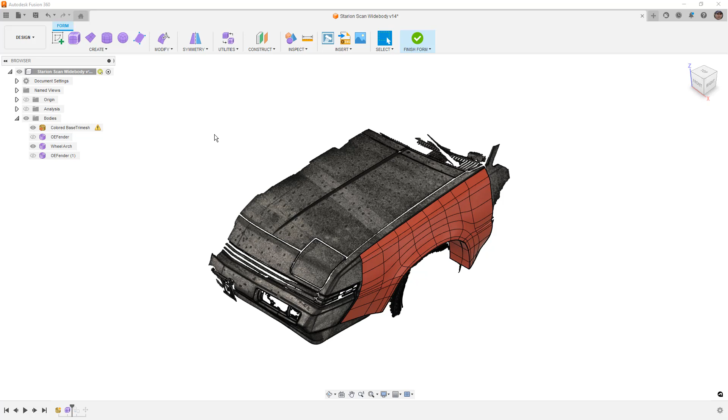I've asked for feedback on details or features you'd like to see. I had a comment for some canards, for some venting, and these are all features we can get to, but generally those are going to be much easier and more realistic to do after the form is done, in surfaces where we can have better control over things like cutouts and creating things like the canards on the front. We will get to those features, and I appreciate all the comments, so I'll tackle those as surfaces later on.

At this stage, what we want to do is take a look at what we have and any updates and changes we want to make. In the last video, we started adding some detail because we connected all the pieces together.

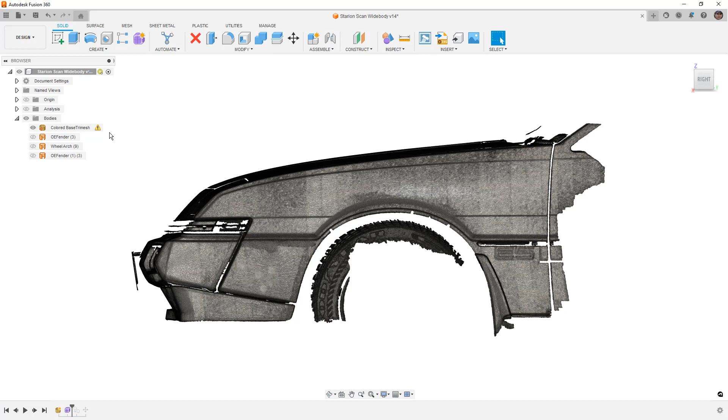If you're just opening this data set, you'll probably have to go into the form's workspace, which means double clicking or right clicking and editing the form. Before you do that, I always think it's important that you hide all the other surfaces. If we don't, for example if I show this fender and go into edit, I'll get this ghosted version of the fender, and that can be problematic when you're trying to model something. So I like to hide those. The mesh body doesn't really matter, but I do like to hide the original.

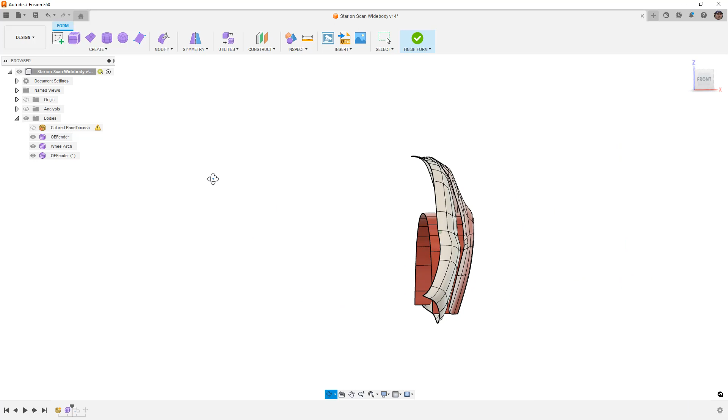Now we're going to talk about some of the things we still need to do to clean up this version. We haven't added all the detail, there's still more to do, but you'll notice the wheel opening, the arch, is not really smooth. We've added some extra edges and some things have changed, and now you can see it's sort of pulled away in this corner. So we need to fix that.

Before I get too much further, there was a big Fusion 360 update this week. You might see some changes. If you open a file, it might ask you to update if it was created in an older version of Fusion. This is happening on Saturday, February 4th, when I'm filming this. This video will probably come out tomorrow, depending on if I edit it tonight or not. But there's a chance, since updates happen frequently, that you might need to update the form body.

Just keep that in mind. I do want to also note that my settings here, the environment is photo booth, the effects, ground shadows, ambient occlusion, anti-aliasing, those are all turned on. And my visual style is shaded with visible edges.

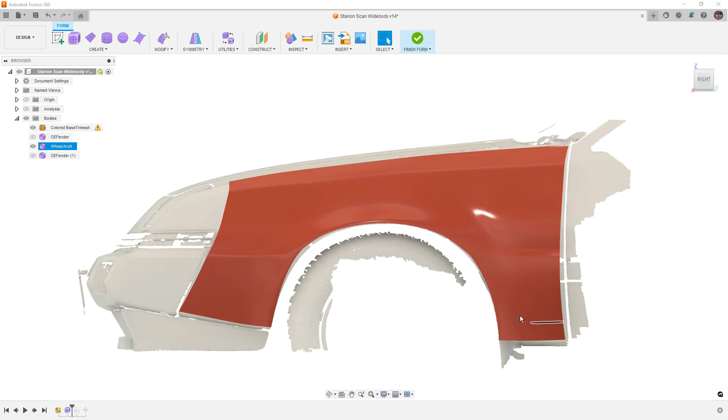Now, I do toggle back and forth between shaded, which is Control 4, and shaded with edges, Control 6. I like to do that because it helps me see the shape a little bit better and see how it reacts to the light. This helps me find problems in the design. And I also use Alt 1 and Alt 4, which allows me to go back and forth between box display and smooth display.

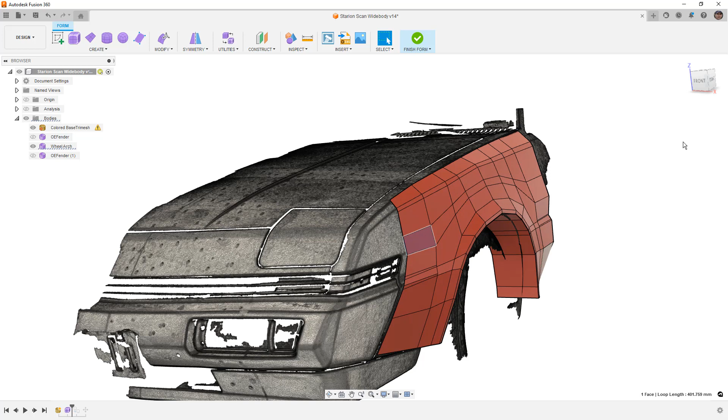So keep those two things in mind. Those are generally the shortcut keys that I use quite a bit when I'm working with forms. Now that we have that said, let's talk about some of the issues or errors that we want to take care of, some things that we want to fix in here.

So generally when you're working with forms and you're dealing with a wheel opening or a wheel arch that is mostly cylindrical. There are almost no cars out there where this is actually a true cylinder. In most cases, they're stretched out a little bit from front to back, or squared off in some cases, depending on the vehicle. In this case, we started out with a perfect cylinder and had a really good match for the car, but as soon as we started to add more edges, things got a little out of hand.

Now, one of the things that we want to look for when working in forms is that the edges should generally point to the center of the wheel. And what we have here is we've got these edges that point to the center of the wheel, but we've got some that are not. You can see here, these are pointing down. And what ends up happening is this is going to cause us some problems in the curvature.

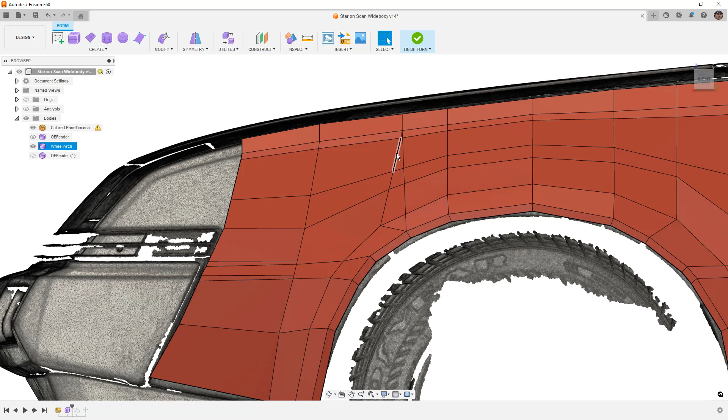So some of the things that I want to fix first is I want to go into insert point, and I'm going to just sort of re-topologize this by adding that edge. I'll double click this one and hit delete and sort of clean that up a little bit. Now, while that's not a perfect solution, a lot of times that does help us smooth things out a little bit.

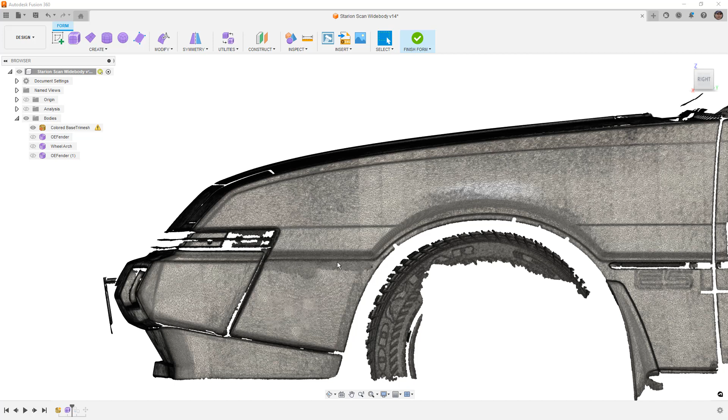The next thing that we want to do is we want to fix what's going on in this corner. Now, this is a tricky one to do in forms because ultimately what we're looking to do is we're looking to try to match the curvature or the edges that are on this car.

It's kind of hard to see in this sort of scan view, but we have some harder edges on the car that go straight back and terminate into this flare. And then we've got these harder edges that go back and actually roll up and over the arch.

This kind of geometry is very tough to do with forms simply because of the way that forms works in Fusion 360. So we do need to manipulate things a little bit. And of course, when you're making a fender flare, you don't need to match the original geometry perfectly, but I do think it's nice to try to do that and work with it when you can.

So what I'm going to do is I'm going to begin manipulating some of these edges by using edit form. I'm going to do a box select here. Now, I did have a comment about an older video.

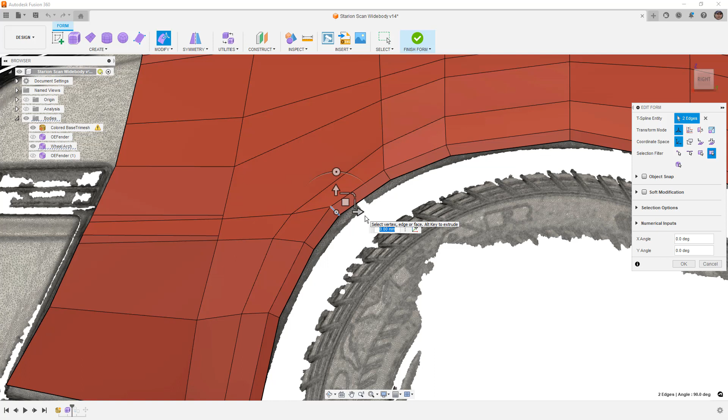Someone was using box select and they were having trouble getting these edges when they were looking at it in the side view. Now, if you use box select, there's a couple things to think about. When you go from the top left to bottom right, box select will grab anything that's completely inside of the box. If you go from the bottom right to the top left, it's going to grab anything that the box touches.

That's important because you'll notice that we've got edges and faces selected, but not vertices. It's just the way that it works. So whenever you're trying to select just this edge to move things around, top left to bottom right, you want to double check your selection dialog for your selection filters. And you can see here that we've got T-spline edges, faces, and vertices.

If I happen to have edges turned off, I won't be able to select the edges necessarily, but it is a selection priority. You can see here that it does end up turning itself on and off depending on your settings.

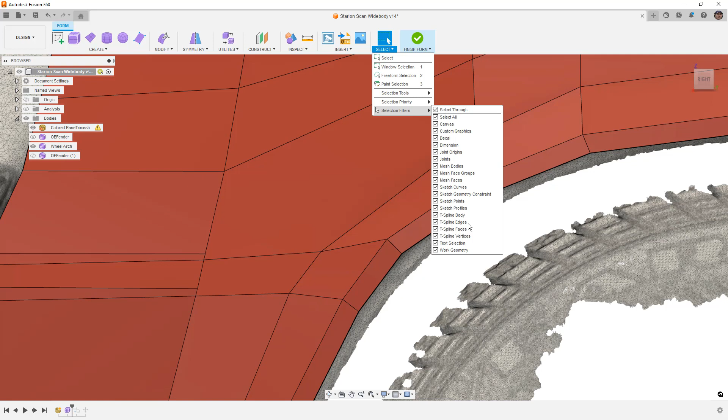Now the reason I mention that is because when you're out of the edit form tool and you go to your selection filters, you have a very different list here. You've got your T-spline body edges and faces and the T-spline vertices, but this is a different selection menu when you're in edit form. So just double check that if you are having problems following along in making those selections.

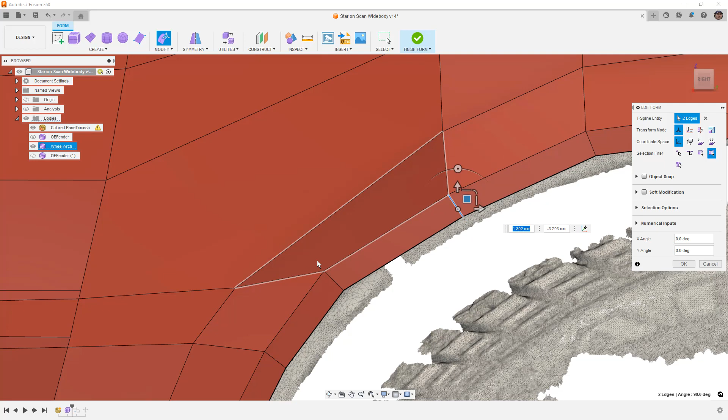With that out of the way, what I'm going to do is box select this edge here, which also grabs the one going straight back, and begin manipulating the entire thing into position. Now, generally what we do when manipulating things manually like this, which is usually a last resort, you want to start by using things like scale and rotate and moving entire edges around. But when we're doing it manually like this, what we're trying to look for is the transition between each of these edges. We never want a straight line and we never want a drastic change. We want it to be very gradual.

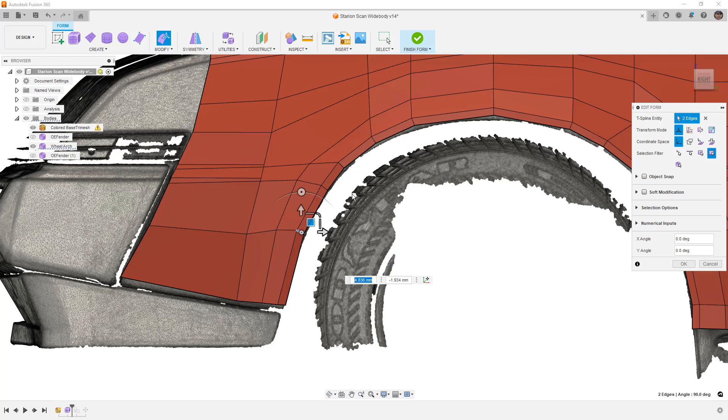Same thing over here. We've got a fairly drastic change in terms of the angle between these two edges, and then essentially a flat or completely straight line here. Now that's going to cause us problems, so I want to make sure that I move this around and adjust these angles accordingly. So again, just moving it around a little bit.

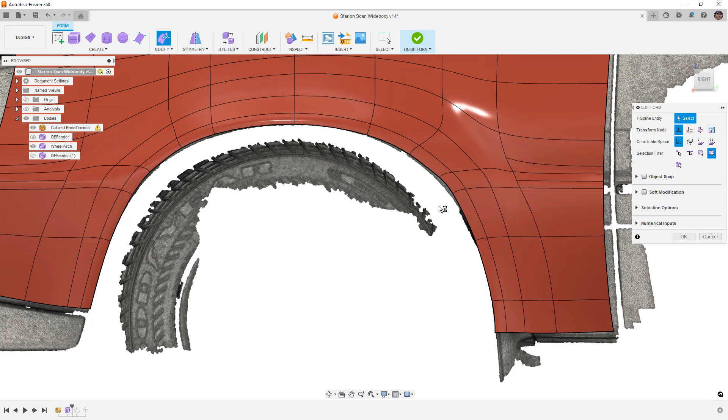And now I'm going to go to Alt and 3 and take a look at the smooth display. You can see we're a little bit closer. It is still pulling in this area just slightly, but it's looking better.

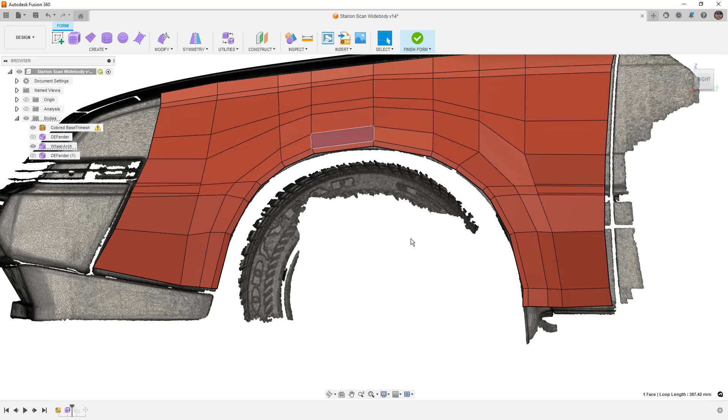Now, before I go any further, what I want to do at this stage is use the utility make uniform. This is something that when you're working in forms, you'll end up doing quite often, because what it ends up doing, if we go back and forth between box and smooth display, is it's going to take the geometry in the box display and the geometry in the smooth display and almost stretch them out.

Now, the box display is our guide. It's the rule that we're using to create the curvature. And oftentimes the edges in smooth display, for example if we take a look at this edge, these edges are in different positions because ultimately what we're doing is driving the tangency and curvature directions. So when we use something like utilities and make uniform, pay close attention to some of the geometry.

For example, in this area right here, when we say OK, you'll notice that these two edges stretched out just slightly. If I undo and redo, you can see what's happening is this edge pulls in just slightly and these edges spread out. So the make uniform is helping us relieve tension in certain areas of these different surfaces that we're creating. Now, it's not like a band-aid tool, but it's something that you do want to be comfortable with when you're playing around with your forms.

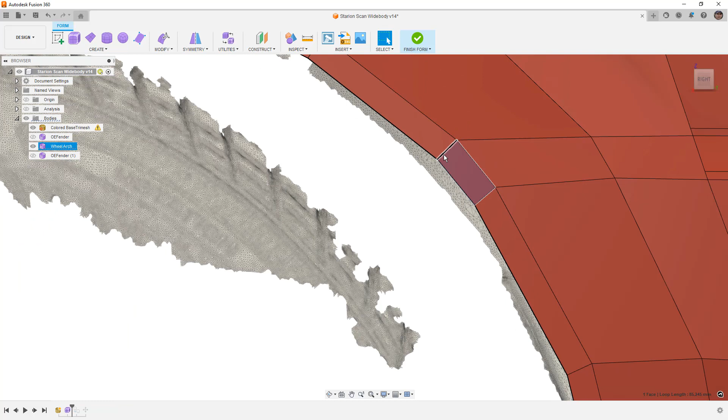Now, at this stage, I'll note that this is still not great. And if we take a look at this in box display, it's because of basically the angle of these edges, and these transitions here, that's causing us problems. So I'm going to do a little bit more work here and see if I can sort of normalize this curvature. I'm going to pull this one up slightly.

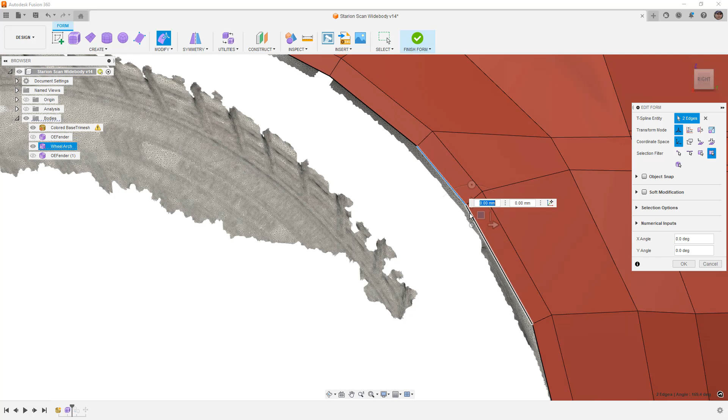I'm going to pull this one down. And when I'm doing this, again, I'm looking at the change in angle between these edges, and I'm trying to make it the same as the change in angle between these edges. So when I go back to my smooth display, it's looking a little bit better. And once again, I like to use the utilities make uniform and just make sure that we don't have any drastic changes there. So that looks pretty good.

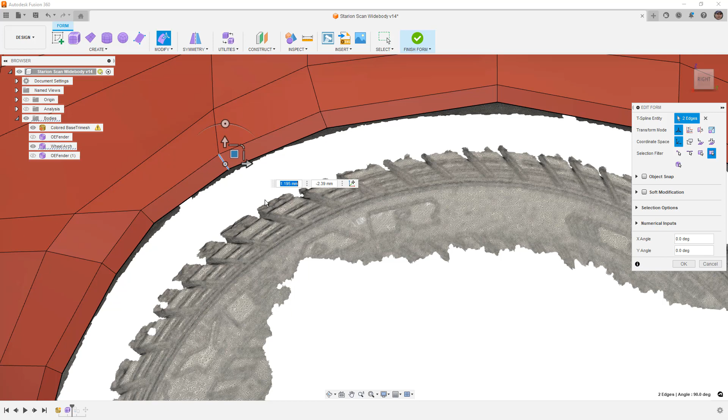I still have some areas over here that I want to fix. I'm always doing this in box display. I don't like to get into the habit of doing this in smooth display because it ends up creating bad geometry if you're trying to force the smooth display to look a certain way. So you want to really get comfortable with doing this in the box display and getting pretty good at it.

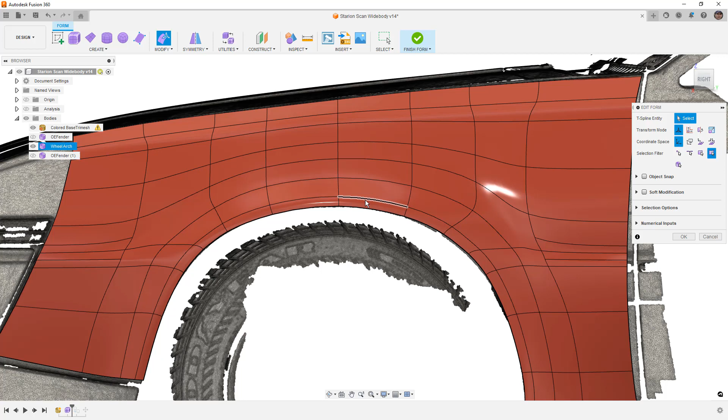From here, I will note that the size of these faces is changing. It's getting fairly large up here and they're fairly small in this transition area. While that's not necessarily something that you have to avoid, it is something that is going to be potentially problematic if you start to bunch up geometry in some areas and have a pretty wide curvature or a wide distance between these edges in other areas. So just something to pay attention to. Again, not necessarily a bad thing or something you have to avoid, but it is something you want to keep in mind.

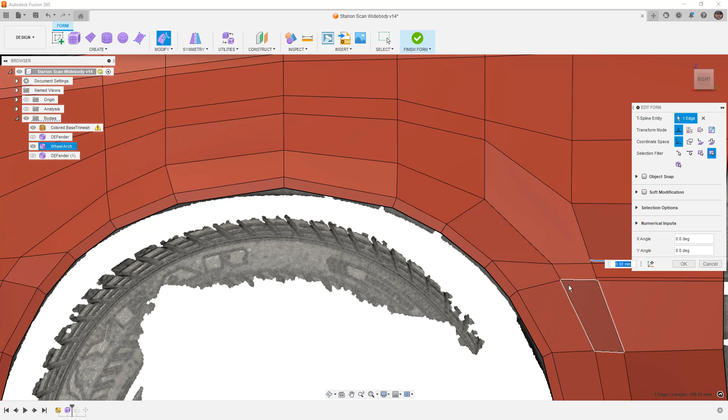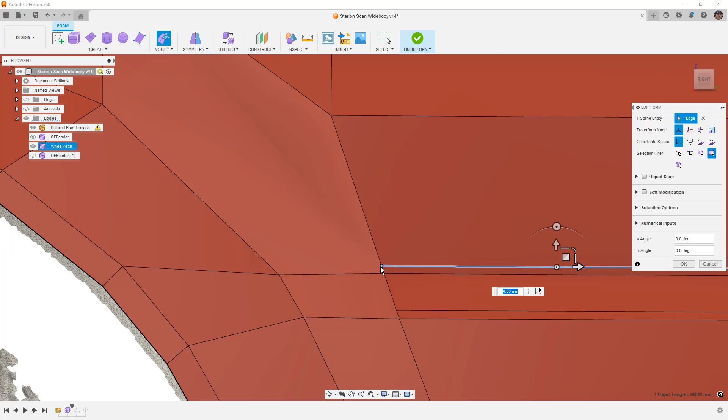Now, the last thing I want to talk about in this wheel arch is this face, which is something we 100% have to address. I generally avoid using T-points, essentially an edge that ends at another edge. Notice this edge is still straight while this one coming in terminates in the middle—that's what we call a T-point. When it terminates and creates a star point, it produces different geometry. These are things we need to look for: T-points and star points.

But more importantly, we need to identify that this face has 3 sides up against our wheel arch and 2 additional sides over here in this large flat area. Generally, this is a bad way to deal with curvature. You don't want what's called an n-gon, something with more sides than that.

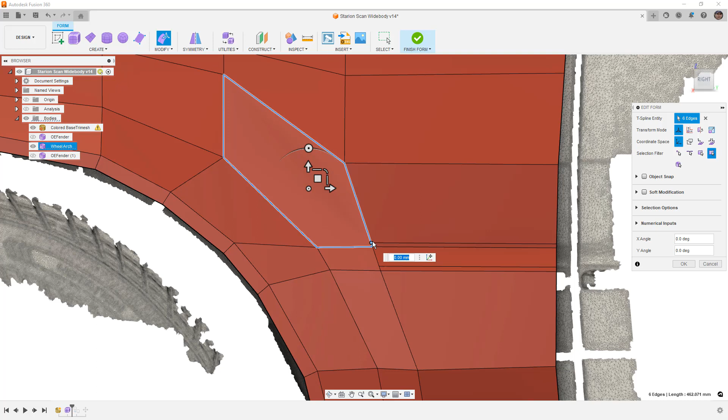If we take it down one step further and identify this T-point here, we've now added a 6th side. That T-point is going to be carried over a little further—I don't like where it terminates, but at this stage we want to make sure we identify the number of faces we have. So that's a face we have to take care of, and we have the same problem on the other side.

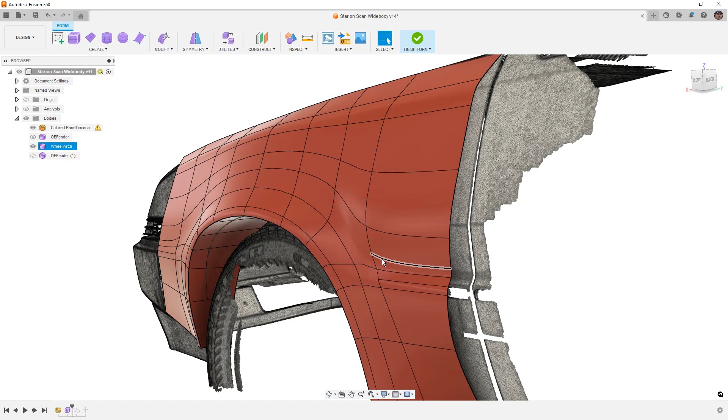But before I do, I want to address the curvature coming in. When you're starting designs like this, you often have a good idea of where you want edges and changes in curvature to happen. When we use T-points, we can create good geometry, but we have to be careful where they end and where we want those transitions to happen.

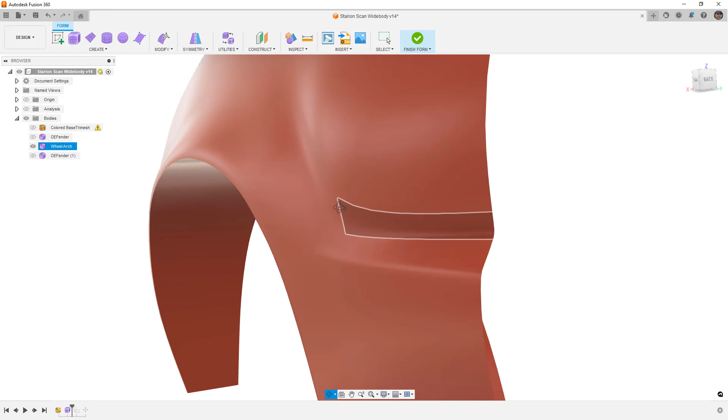If I use Control and 3, one thing we can see is we've got a tight transition here. I'll get rid of the mesh to speed this up. We've got a nice tight transition here and here, and then it very gradually blends away where that T-point ends. The same thing happens up here—we've got these two edges that end at T-points, and then they start to fade away.

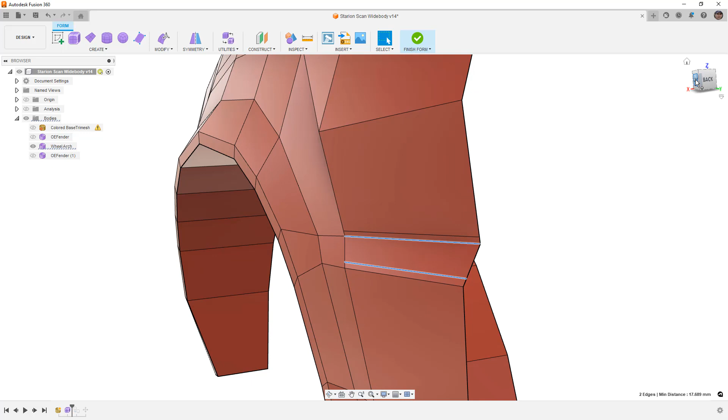If I want to drive that further into the wheel arch, I need to carry those edges further. So I'm going to play around with this on the back side by using Insert Point, and take an edge from here and bring it straight forward, allowing it to create that geometry.

Now it's thinking here, which is never a good sign. If it's thinking really hard about curvature, sometimes you'll end up crashing Fusion. In this case it seems okay. I'm going to repeat that, roll the dice here, and carry this one on.

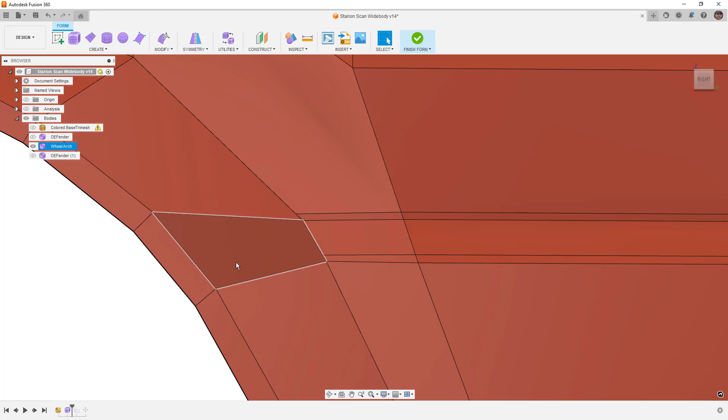Remember, when you're using Insert Edge or Insert Point with this simple insertion mode, you're adding the edge where you specify without making any adjustments to the curvature. The reason that's important is because we generally avoid straight edges. In this case, I'm going to allow it.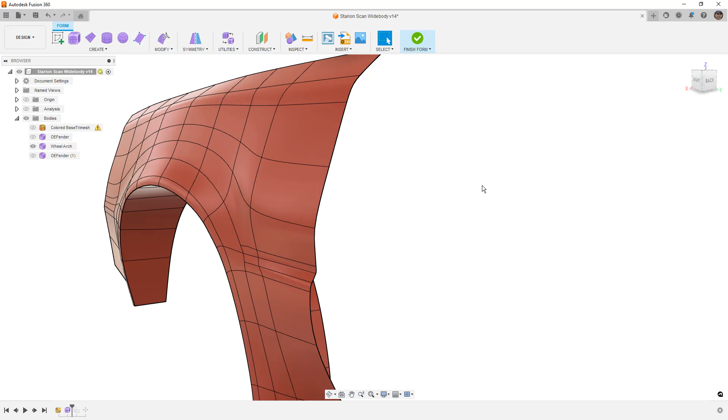So I'll do Alt-3 to look at Smooth Display, go to Utilities and make Uniform, and take a look at the results with Control and 4 to see if those edges are carrying further into the design. You can see that they are, but they've created this weird ripple in this end-on surface, because it doesn't really know what needs to happen in that corner.

In that corner, we essentially need to figure out what we want to happen. So when we look at it from the side, one thing we might decide to do is use Insert Point and carry this edge further into the design. I'll do this in the box display by carrying this edge and making a triangle here, then undo it, just to take a look at what this does to our curvature.

When we have this, what ends up happening is we're bulging that surface out, and the triangle is essentially going to be a flat patch. It might be okay, but really what I'm looking to see is that curve go up and over. This can be really hard to visualize, so sometimes using a zebra analysis can help.

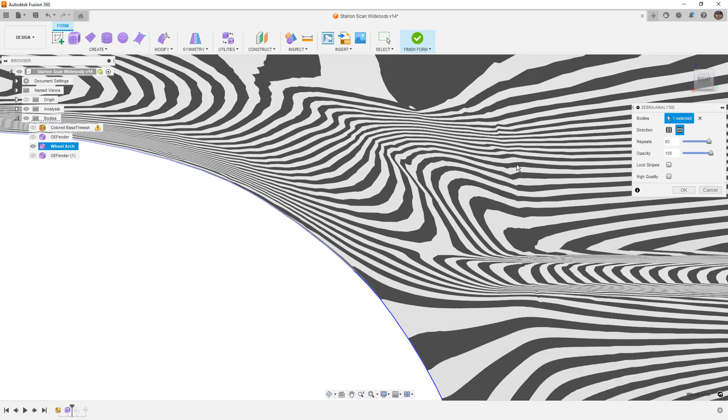I'm just going to go ahead and increase these lines. What we're going to see here is that we've got these edges where we have those two tightly packed edges carrying forward just fine. But when we get into this triangle region, we really don't have good curvature. Things are bunching up and going all sorts of different directions, and we can even see there's a little ripple that happens, and I guarantee there's an edge right there.

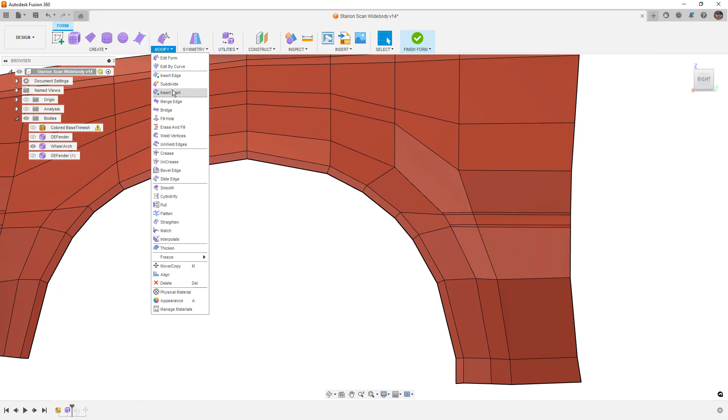So let's bring our edges back. Let's go back into box display. Let's get rid of that. Another option we have is to try to carry this from here and just carry it into the wheel arch. We don't have to go all the way, but I am going to for this example.

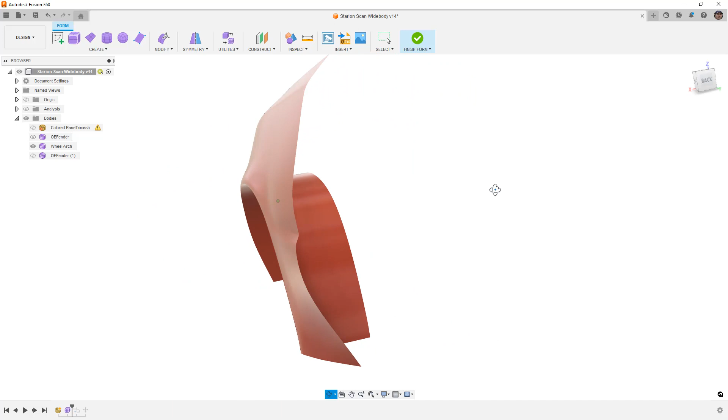Once again, we want to make sure we use our tools to manipulate this. We don't want it to be completely flat there. We'll take a look at it in Smooth Display. I'm going to use Make Uniform - it's always a good idea for us to do this. Control and 4 to hide my edges. And that's looking a little bit better. There's still kind of a weird bulge here that I want to take care of.

But if we take a look at Inspect and Zebra Analysis, we'll make these horizontal and increase the number of repeats. Now we can see that we're carrying the curvature in. We've got something happening in this corner that's probably less than ideal, but what I can see is that the curvature is carrying over much smoother than it was when we had that triangle. These are the kinds of things we want to look for - the differences in the direction we're going with each of these edges is going to make a big difference.

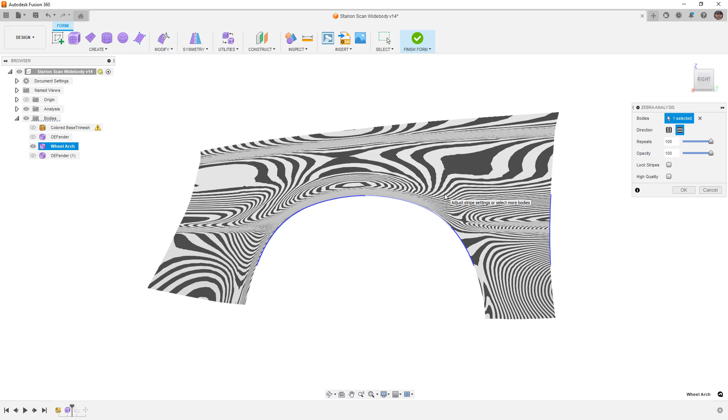So let's cancel the zebra stripes again, bring the edges back, and note that now we have this star point here. Now, before I get too far ahead of myself, I want to repeat that same process over here because we are dealing with the same sorts of curvature.

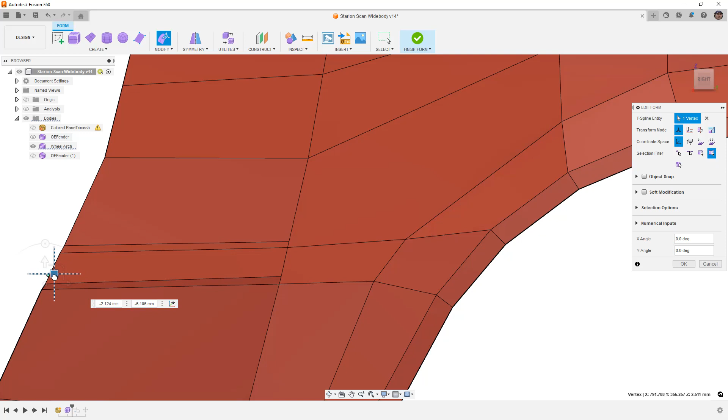Now I'm going to go to Modify and Edit Form. I want to tighten this up and make these a little bit more horizontal, and maybe rotate this around to the front and move them to the correct positions. I can always move these around later, but I just want to make some minor adjustments before I add any additional edges.

We're going to use Modify Insert Point. Just like before, we're going to carry this forward. We're going to right click and repeat that, do the same thing down here. These are going to be our driving curvature edges. And then we're going to carry this one in. The red dot is going to be our midpoint - we're going to follow the midpoint all the way in.

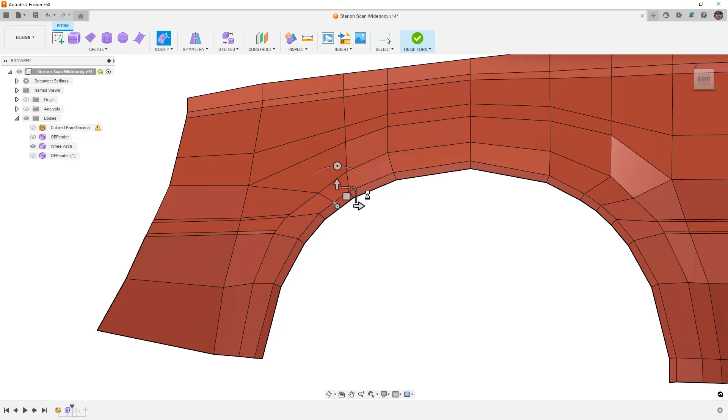And once again, we could add T-points here. We don't necessarily need to carry it all the way into the fender well, but I kind of feel like if I can avoid T-points, then I try to. Now, as I'm pulling this one in, I might decide to make some adjustments and change the direction of this one here. It's kind of hard to describe, but we want to make sure the spacing between all of these is as symmetric as possible.

It doesn't have to be perfect, but the more time we spend making things as uniform as possible, the better the overall result generally is. Again, it's not something that is perfect, but generally speaking, it is better if we can make things uniform. So I'm just going to move that around and take a look at the result here.

Again, when we use Insert Point or Insert Edge and we use that simple insertion mode, it's going to make it flat, so we want to manually move things around. Take a look at this in Smooth Display. I'm going to go to Make Uniform, and Control and 4 to hide my edges.

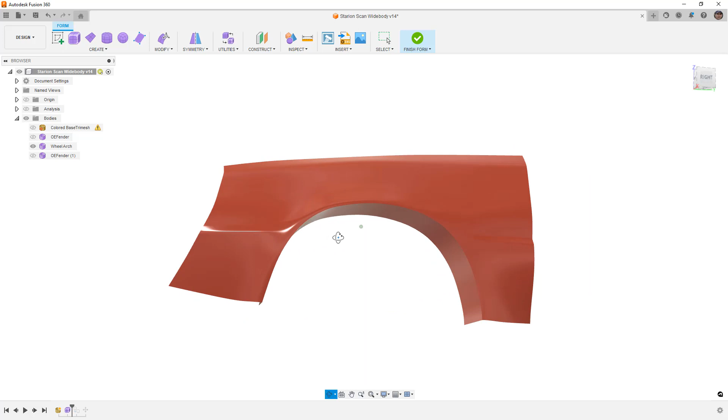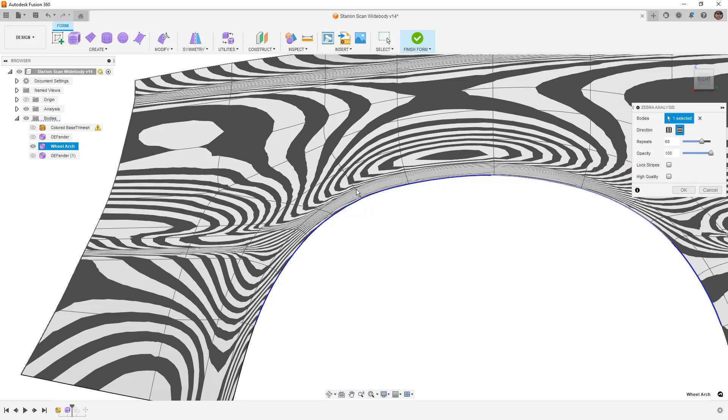Now you can see we're starting to carry that curvature up a little bit. There's still a lot of work that we need to do here, but overall I think it's looking much better. I'm going to take a look at the zebra analysis again - horizontal stripes, increase the repeats - and what we should see here is that on these edges we're carrying the curvature into the fender, and this one still has some weird wave going on that we need to fix.

But on the back, we see the same thing - we're carrying that curvature into the fender. And then on the back, we sort of have a wave here that we need to fix. But overall, I think this is a better result. We're moving toward a better result.

So I know at this point we're 23 minutes in. It probably doesn't seem like we did a lot, but it is important that we spend the time now tweaking these little nuances of the design before we get too far into the rest of the design.

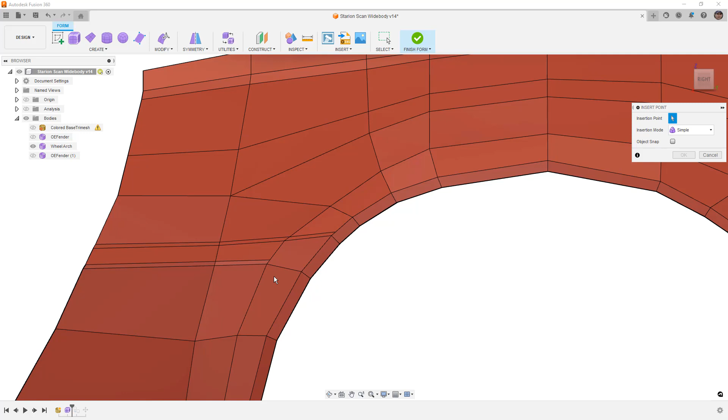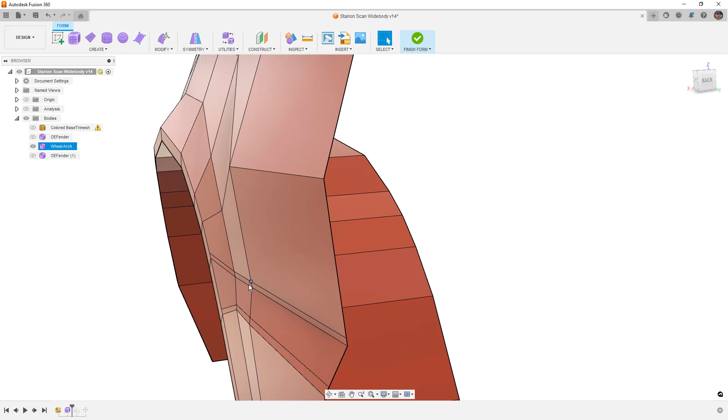So back in box display, I want to continue tweaking and adjusting these shapes. I'm going to go to insert point and carry this in one more time, repeating it down to here using these T-points. I like to use my right click marking menu—it's really quick, especially when using the same tool over and over, to drag it to the 3 o'clock position for OK, and up to the 12 o'clock position for repeating that last command.

Now at this stage, once we have these edges added, I can come in and make adjustments to these edges to add a little bit more curvature, and push them closer together. Same thing here—I'll leave the one that intersects with the fender well or wheel opening, but move these around to tighten them up.

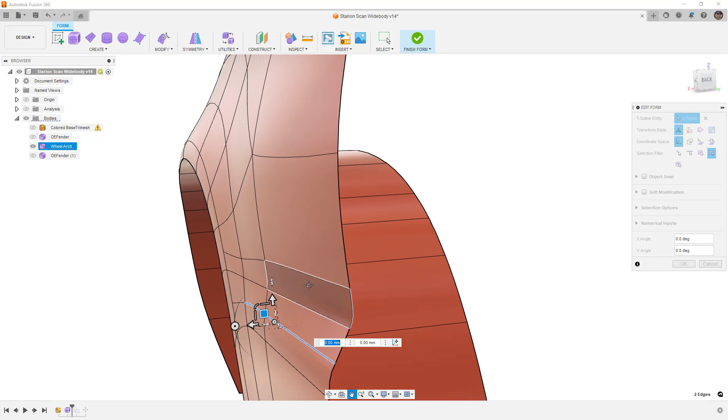Now if I take a look at this in smooth display, they're still relatively far apart—you can see those edges are quite far apart. In order to really get a tight transition, they have to be really close together. So I'm going to move these a bit closer together, do the same thing with this one, and then take a look in smooth display.

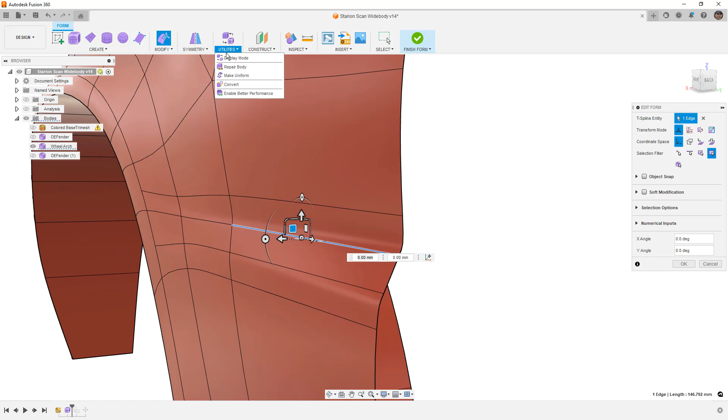I'm going to try my make uniform utility, see if we can tighten those up a little bit. Now Control and 3 to get rid of the edges. You can see we're starting to build out those tighter transitions that blend away into the fender.

These are the very tricky kinds of details when you're working in forms. They're very hard for us to get these harder details in, and honestly, they're usually easier to do in surfaces than they are to do in forms.

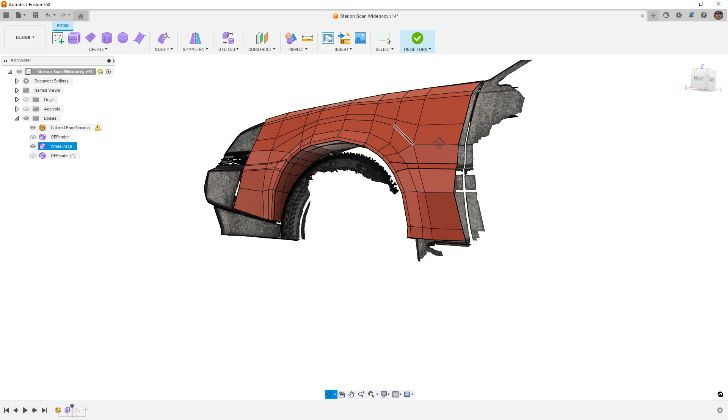The other thing we want to talk about is how we're going to meet the door, or transition to the door, because this bulge here is not ideal. So what I want to do is start to think about what this shape is going to look like where it meets the door.

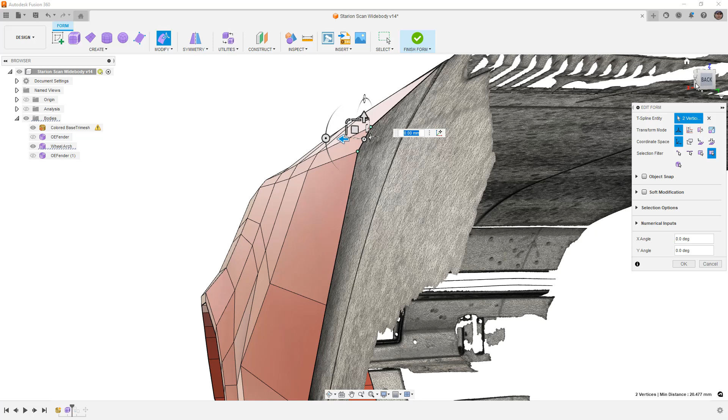Now for me, I'm going to take this vertex back and move it in toward the car. And I'll take the next vertex up and move it in toward the car a little bit, and potentially take these two and move them together. Anytime you have a feature that is a somewhat consistent width, you want to try to move it all together as one. And this feature down here, the door—the distance away from the door is pretty wide.

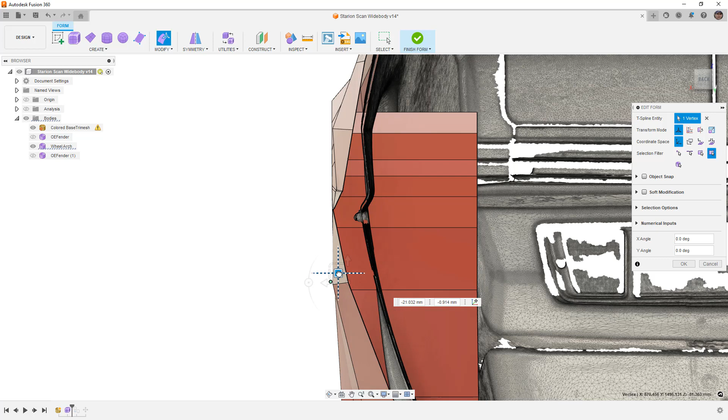I want to move that back in toward the door just a little bit as well, so I'll sort of bring that in. And then again, these two right here are going to be important—I'm going to select that edge and pull it in closer to the car, and then this one here, select that edge and pull it in closer to the car as well.

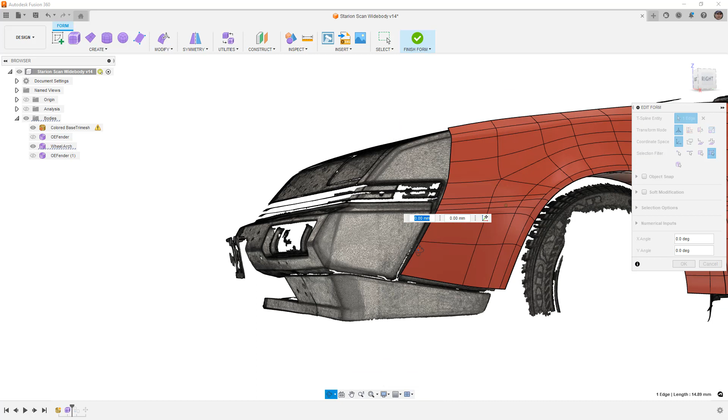Now the reason I'm doing that is because I want the fender flare to have a gap close to the door, but I also want to make sure it doesn't just look too bulky. Oftentimes what can happen is it can just look awkward and bulky, and that's not what I want.

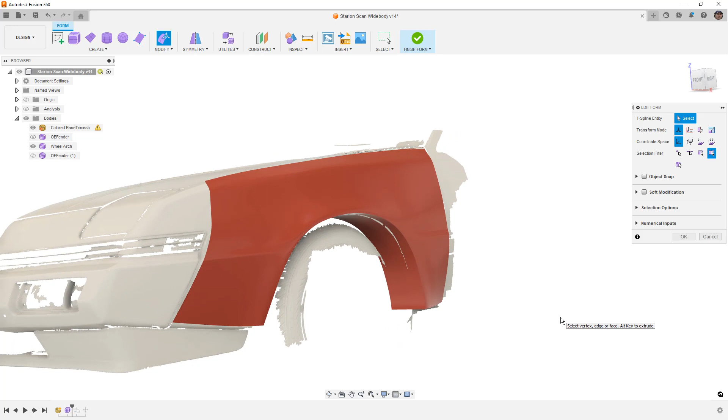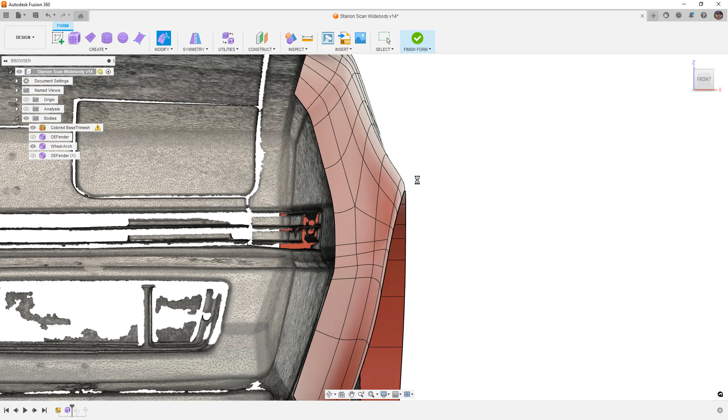So now that I'm starting to get that detail, this is still a fairly basic looking fender—it doesn't really have any extra craziness to it, it just looks very mild and very bulged out. So it doesn't look very extreme, but it's giving us the extra width that we need to handle the wider tires. But let's go ahead and start adding some edges as we get closer to the end of this video so we can start forcing some tighter detail, and talk about a couple of tools that we can use.

In this case, I'm going to double click an edge, make sure that I get a full loop. Then I'm going to go into Modify and Bevel Edge. Now, Bevel Edge is an interesting tool, and it's one of the ones that I kind of like to use. I'm going to take a bevel edge in at, let's say, 0.08, which is pretty tight.

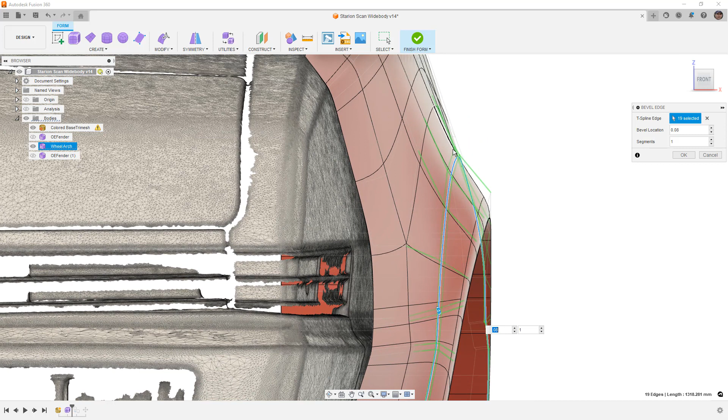Using a number of segments of 1, what this is going to do is take the edge that we have selected, essentially get rid of that edge, move one edge 0.08 away, and add another edge 0.08 in the opposite direction from our selected edge. This is a little tricky to think about, but when we insert an edge, we leave the edge we have selected in place, and then add another one next to it.

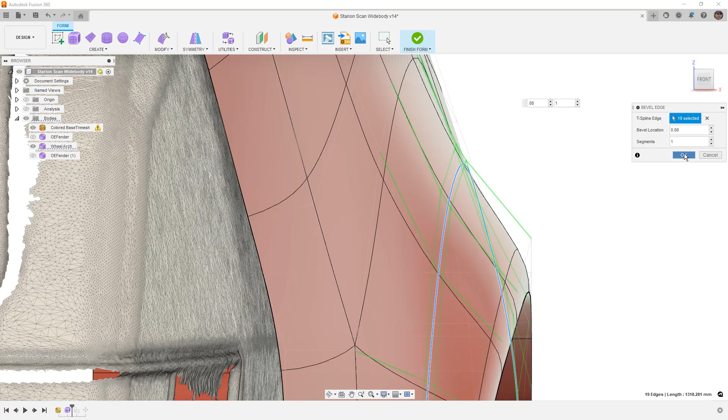When we use bevel, this helps us when we use just a single segment. This helps us get away from having that flat distinction, that flat face or flat edge between the selected edge and the new one. So I'm going to say OK. And this helps us drive some curvature into the design.

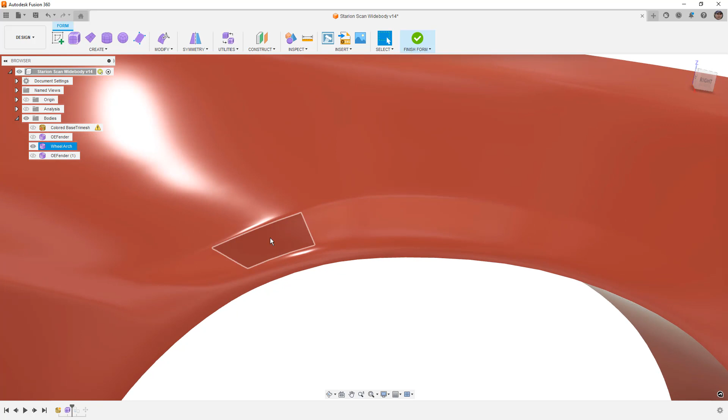So now if I use Control and 4 to hide my edges, I'm going to hide the base as well. As we rotate this around, we're starting to see a tighter transition in that area. And what happens here is it starts to create that flared shape as we get down here. As we rotate around to the back, it's carrying over into that feature, and you can see that it's carrying out here.

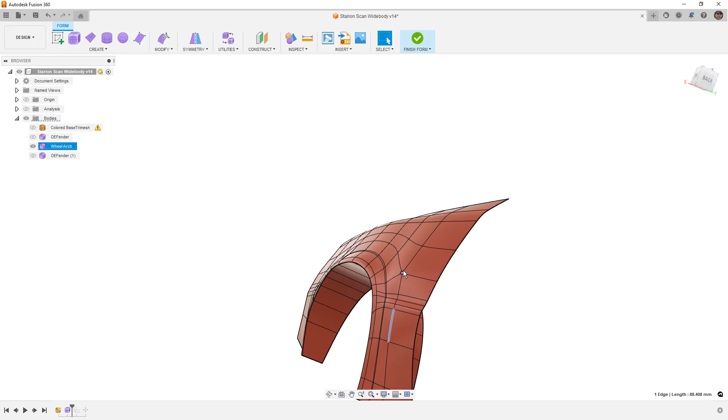Now what this doesn't help us with is what happens as it gets further down the fender. We don't want it everywhere, but sometimes it's easier to add a bevel in certain places and then get rid of edges we don't want.

So once we're happy with the overall shape, and what I mean by happy is we can select the edge and use things like slide edge. If we want to get it a little bit tighter or a little bit looser, we could move those things around.

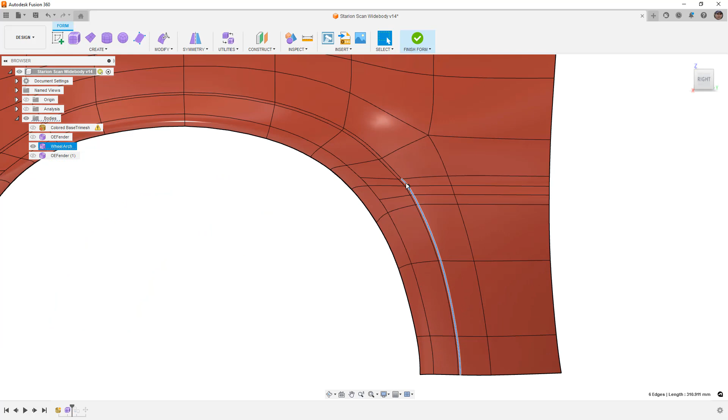And once we're happy with that, if I want it to terminate as it gets closer to this transition, I'm going to select this edge. I'm going to Control and double click this edge, which will grab everything between, and just hit delete. I'm going to do the same thing over at the front. As soon as it hits this edge here, Control and double click and delete. I'm going to use Control and 4 to hide my edges.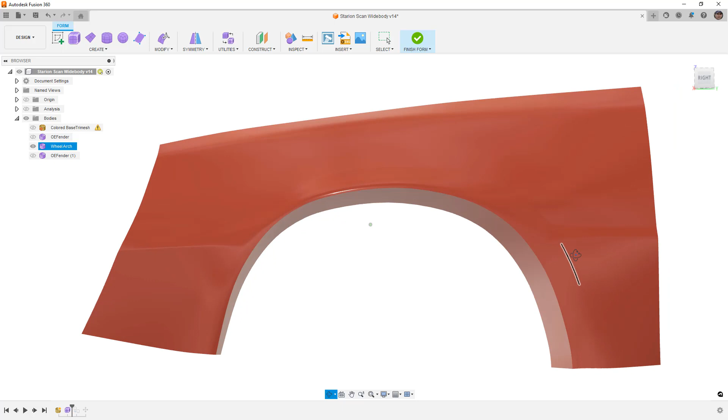And what we should see is now that crease is going to disappear and not carry down the rest of the fender. Once again, this is just not ideal in most cases, but this does help us drive the curvature a bit tighter.

If you want that to flare away, one thing that you can do is use insert point and transition these edges away. So for example, if we want this tight crease to go up and follow that geometry, we're going to end up making some triangles. But what we can do is go from this point to this point right here, then get rid of these edges, hit delete, and Alt and 3 to take a look at smooth display.

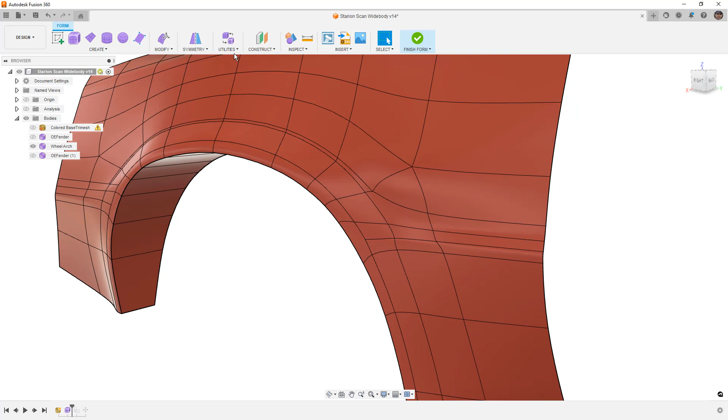So we've added a star point here, which is generally bad, but without having to go through all the hard work of trying to fix that manually, we can use our utilities and repair body. It finds that star point, which in this case is an error point because it's red, and if we click on it, Fusion does a pretty good job of tweaking and adjusting that for us.

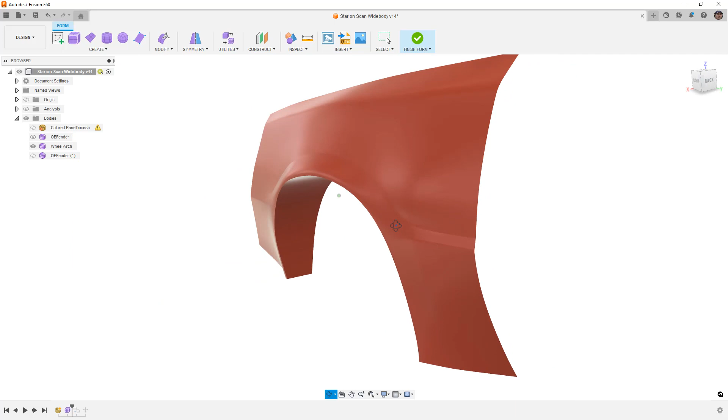So you can see that it automatically made a pretty nice curve and transition there. So we'll say OK, Control and 4 to hide our edges. And now what we should see is that transition goes from back here and up and over the fender.

We still have this sort of a weird bulge here, and that's just a product of the way that the fender is flared at this time. That's something that we're going to have to take a look at.

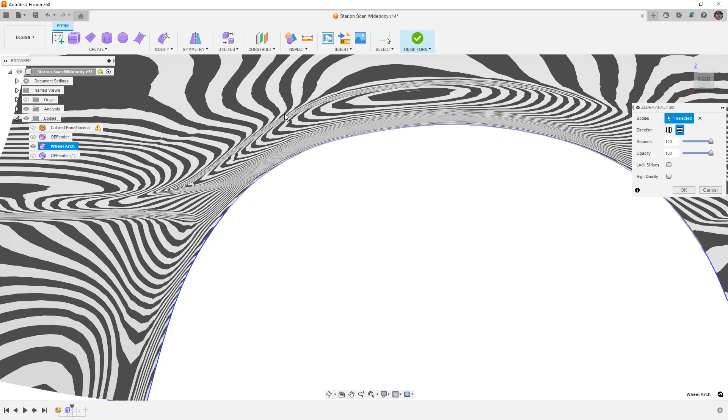But let's do a quick inspect, zebra analysis, make these horizontal, increase the repeats. And what we're looking at here is now up front, we're starting to see this hard edge carry into the fender, or into the wheel arch, and we're seeing this one here carry up and over. And then back here, you can kind of see it's carrying back into that corner. So that's what we're looking for. We need to fix the bulge in this area, which we will take care of.

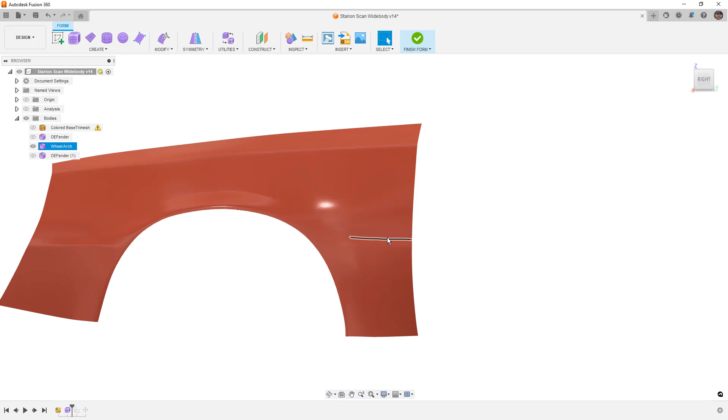We're looking to see where these zebra stripes are bunched up and how the curvature is transitioning. This looks like a pretty good result so far. It's not perfect, not ideal, but it's important for us to identify when we can use things like the repair bodies, which help us find ways to use these tools without having to manually break everything up.

So as I said, this is far from over. Unfortunately, this stuff is time consuming. As I mentioned, we're going through this together. I haven't pre-made this specific fender, so we're running into these different challenges and problems as we go along, the things you would likely run into. Now, forms in itself is very tricky.

It takes a lot of time, a lot of practice. I've done probably hundreds of videos on forms at this point, and each time I still have to go through the same process of adding edges in different areas, seeing how the curvature flows, because every shape is going to be slightly different.

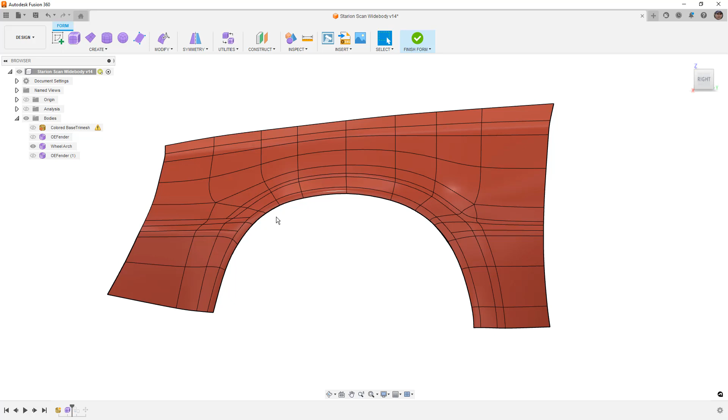There's a lot more that I want to do to this design that I'm trying to temper, because every time I look at it I want to fix a few things, but I want to focus on just these main points.

What I suggest you do from here is take a look at the same things we just did, changing the direction of that curvature, and see if you can transition things on your own. Find ways to make these transitions, figure out how you want the shape to blend and move on your side, and see if you can find a good shape that you like.

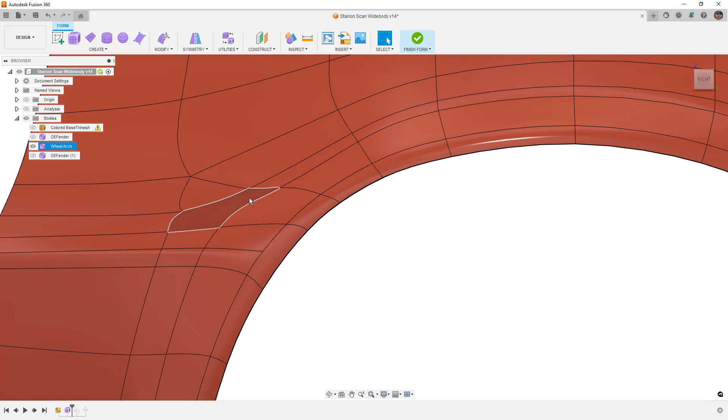So in this case, I'd have to go back to repair body, fix that star point, allow it to adjust those curves for me, and just take a look at the overall shape. So far I'm pretty happy with this.

I do want to fix what's going on in this bulge right here. What I mean is the shape of the fender is too wide. You can see that this point here is too wide. I really want to make sure we stick to around 30 minutes in these videos, but I just cannot leave this how it is. So let's adjust this real quickly.

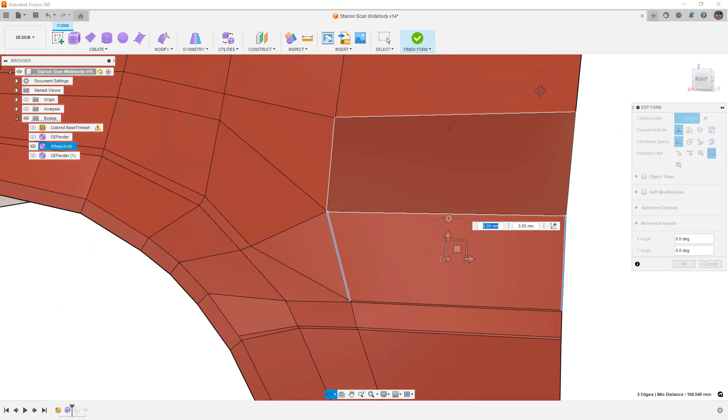Essentially what we want to do is pull this back. What I'm looking to see is that these two edges are parallel or relatively close to parallel. I want to make sure it's not bulging drastically in that area, because this will just produce some funky geometry. So let's take a look at it from the back.

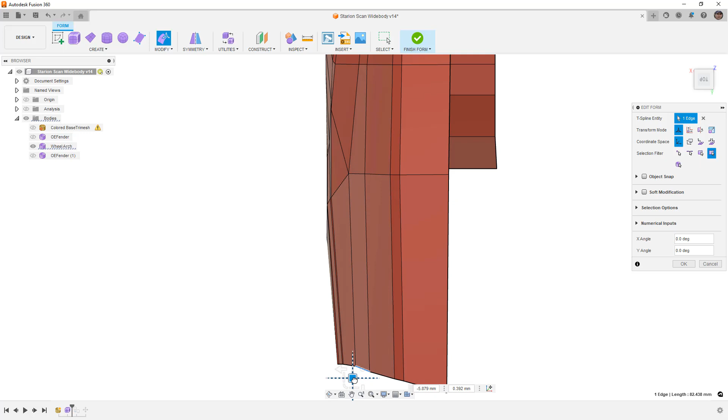Looks okay. Let's take a look at it from the top as well — sometimes that's a pretty good indicator of what the shape is doing. So we can see here from the top that looks like it's pretty far out. I'm going to go ahead and move that back, maybe move this whole edge back. Remember, at this point we haven't really attached it to the mesh — we're just using it as a reference.

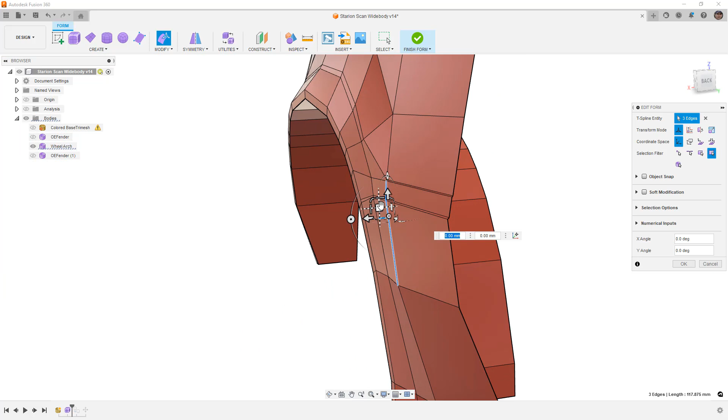So that looks pretty good. I probably want to take this edge back, so I'm going to select there, control double click here, and just move this in. What this will do is help drive the shape. Now it looks like I missed an edge, so I'm going to do Control Z, make sure I take that one with me as well, and push that in.

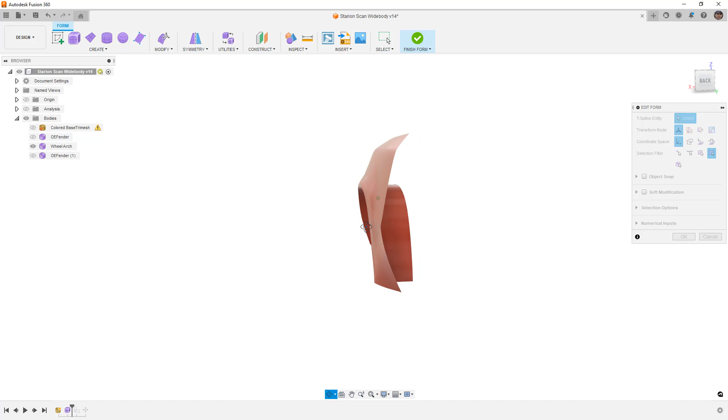So now if I take a look at this, Alt 3, Control 4, I'm a bit happier with that shape. It's not quite as bulky in that area. There's still more we can do, but overall that looks a little bit better. That's a good place for us to stop. Let me go ahead and save the work before I lose anything.

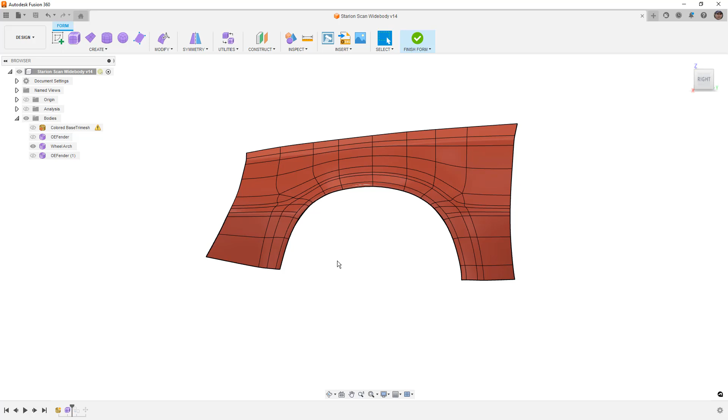As we carry on, what I think I want to do from here — because we've really tackled a lot of the basics, a lot of the general shape creation — I don't want to scrap everything we've done, but I do want to start making this a little more out there, because most of the time when you're creating these wide bodies, you're making something unique to you. So I want to take what we've done without losing that information, and start to make it a little more aggressive and unique.